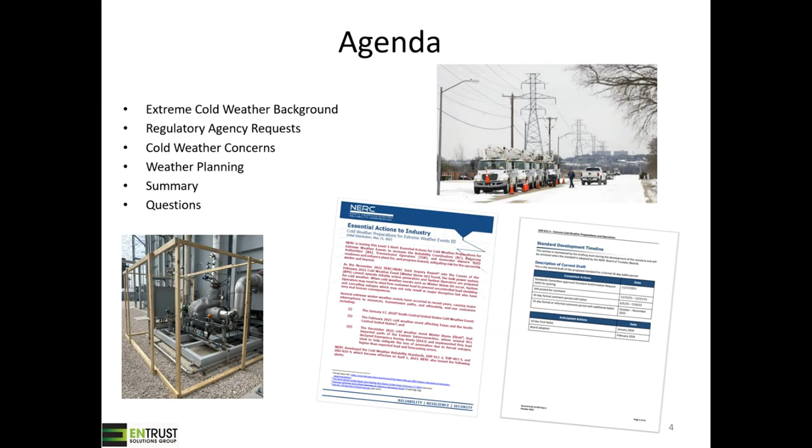Extreme cold weather background. So recent cold weather events: January, February of 2019 was what was called the Midwest Arctic Polar Vortex. Now, it's not impressive, but downtown LA never reached greater than 70 degrees for the whole month of February, which is a pretty significant event for LA. Chicago was minus 23 degrees with wind chill of minus 52.

More recently, February 2021 was Winter Storm Uri. During this event, there were 4.5 million homes and businesses without power in Texas, a record low at the Dallas-Fort Worth airport of -2. Keep in mind, this is Texas. And it was estimated that just over 700 people died in Texas due to the cold weather event.

December of 2022 was Winter Storm Elliott. This had single-digit temperatures in the southeast. December 23rd, which is right before Christmas, 1.5 million customers without power. Each of these events significantly strained the electric infrastructure, causing inoperable utility equipment and power outages. All of these events impact our day-to-day lives.

I am now going to pass it over to Rachel to discuss regulatory agency requests that came out of these events.

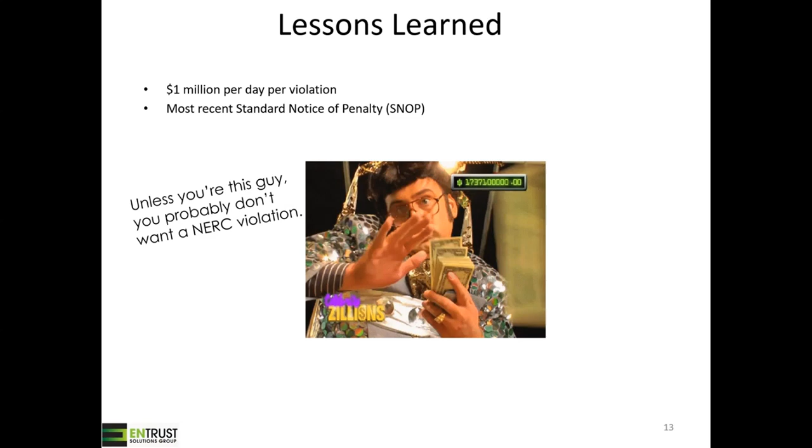Okay, so I always just like to remind people that unless you're this guy right here, he looks like he's got plenty of money to throw around. Unless you're him, you probably don't really want to get a NERC violation that results in a fine. And I just like to remind people that fines are capped at $1 million per day per violation. So it's not cheap. And I think anybody who's been in the industry a while knows that fines are rarely that expensive, but it's scary because you don't know that they won't be.

A lot of standards that had never really had any penalties and violations associated with them are now getting some pretty big fines. And so I would suggest that if you even have a question as to whether NERC or your regional entity will fine you, go and look at the most recent notice of penalty, and you can see that they are fining people, and it's not fun or cheap when it happens. So just don't forget, think about this guy. Unless you've got lots of money to throw around, don't get a NERC violation.

All right. Thank you, Rachel. So, having discussed the EOPs and the associated requests from the regulatory agencies, we're now going to transition to discussing some common cold weather concerns and how to address them in the facilities. So we'll just start with the fuel system. The fuel supply is typically outside the scope of our assessment.

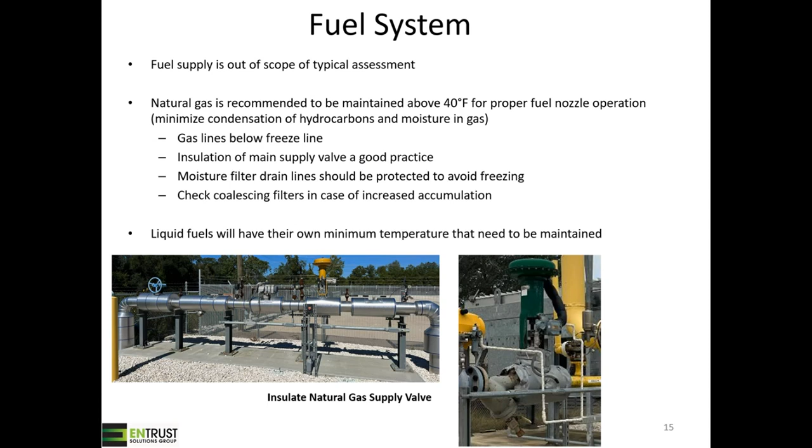Gas turbine inlet and bell mouth. So inlet icing and snow accumulation can cause excessive pressure drop, causing unit derate or trip. Well-sized hoods should be used to protect the inlet from snow. Coalescing type filters, if used, should be removed before winter. Note that compressor bell mouth icing can occur when inlet air is cold and humid, but actually above freezing. Isentropic acceleration of the air can reduce air temperature as much as 4 degrees, meaning that even though it's 36 degrees out, you could have conditions for icing within your bell mouth.

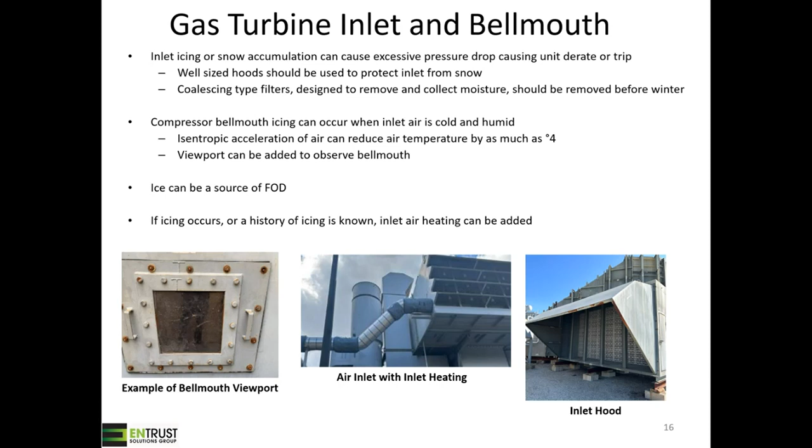Turbines and generator. Gas turbine performance improves with lower temperatures. There are bleed valves and purge valves depending on your configuration that can freeze. If valves are inside the enclosure, that can be a good form of protection. It is recommended to heat the turbine enclosure. A good practice is to place the turbine on turning gear at sub-freezing temperatures.

Note that the timing of any seasonal combustion tuning should reflect current weather patterns. This is dry low emission specific. This tuning does more than just account for changes in the ambient temperature and humidity. It can also account for seal degradation that makes combustion systems more sensitive to the cold weather operation. Just because there were no issues with the combustion systems and reaching emissions during cold weather operation last winter does not necessarily mean you won't have a problem this winter. Recent discussions with our customers ran into a couple instances of units having issues due to the cold weather tune not being sufficient.

Steam turbine performance is not impacted by the cold weather. This excludes issues with the steam delivery system. Generator output improves with lower temperatures. Generators typically have internal strip heaters to ensure moisture levels are kept low. Regardless, there should be a dedicated enclosure heater to regulate the enclosure's temperature. Some units do have minimum stator temperatures to protect the insulation. This ties back to a point Rachel made about ensuring doors are shut. This can also apply to enclosure louvers. They need to be checked for functionality.

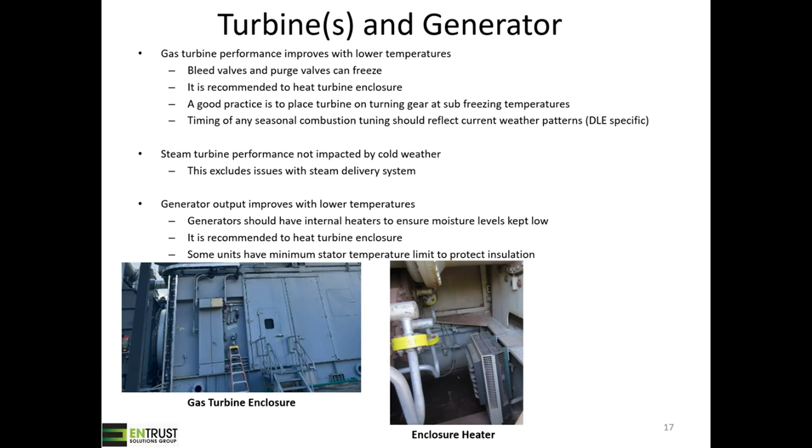Plant air, valves, and instrumentation. Plant air must be kept free from humidity. Compressor drains should be kept from freezing. Air dryer should be capable of dropping the dew point by a minimum of 18 degrees below the ambient. This is an ISA standard. That is a recommendation. It's not a requirement. The Instrument Society of America suggests having your dew point 18 degrees below the expected min-ambient.

So there's a couple different options for air dryers. We recommend the desiccant air dryers. Those have some typical capability of -40, -60, or a -100. There are different kinds of air dryers, the refrigerant style, and those typically have issue meeting ISA standards, even in the southeast where it's typically warmer in the winter.

All critical valves should be insulated. Pressure and flow transmitters for water systems should be protected in boxes with heat for temperature regulation. Sensing lines for water systems should be heat traced and insulated. A note on heat trace is you should ensure that it has been sized for the equipment being protected. We recently had a discussion with someone who actually had too much heat trace applied to a sensing line, which actually boiled the water, giving them erroneous measurements. And this was somewhat problematic during the cold weather because it was up on the top of their HRSG.

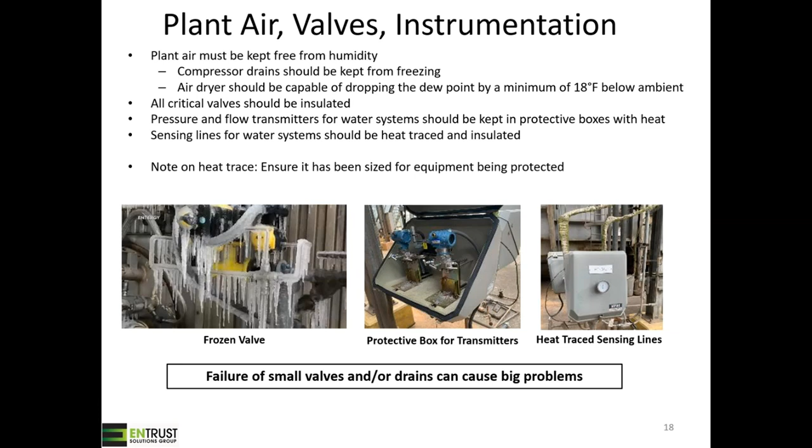Note here, the failure of small valves and drains can cause very large problems. So it's not necessarily that the gas turbine does not work. It can be a drum level sensor goes down. It can be that the plant air compressor drain freezes, so you lose your air. There can be very small components on the facility whose failure actually takes down the full plant. So the attention to detail in the winterization plans is important. Typically, you can leverage successful past operation or past unsuccessful operation to understand where your weakest link is in your equipment.

Now we'll discuss winterization methods. All necessary water systems need to be protected. Typical ways of doing that are insulating water lines with heat trace. You can also use recirculation from a warm water source. A good example of this may be a 50 to 60,000 gallon DMIN tank on site, and potentially you're able to cycle water from that DMIN source back through the line.

That large tank, a good example would be, let's say, the southeast, where cold weather events typically do not last for weeks at a time. It could be a couple days at a time. That large tank will stay warm during that event, so the circulating water can be a good way to keep the water from freezing. Cooling systems that use water wherever possible should have a glycol water mixture to drop that freeze temperature. If you have a DMIN house, a water treatment building, that should be enclosed with heaters.

All unnecessary water systems should be shut off and drained. So if you have inlet cooling, fan sprays, etc., typically these are not used during cold weather operations, so their failure wouldn't necessarily take down a unit. But depending on where you're operating, for example, Texas, just because you had cold weather one day doesn't mean you won't have warm enough weather within a week to necessitate using the inlet cooling. So draining and laying up these systems can ensure you have uninterrupted operation or avoid any derates due to failures of these systems.

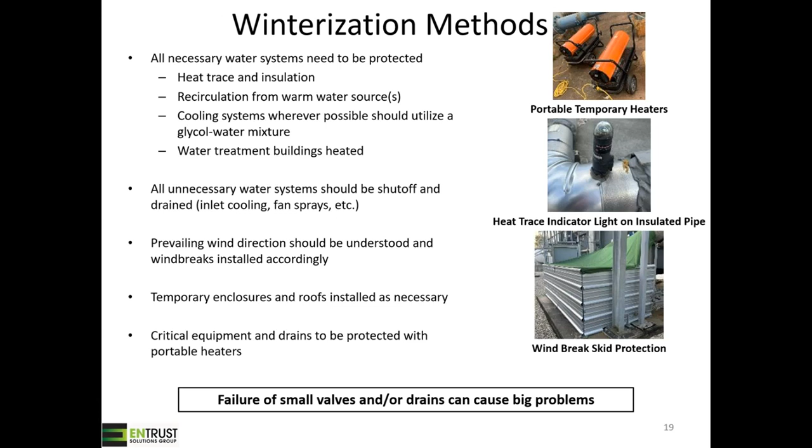The winterization methods and processes used for other water-based systems are applicable to the combined cycle plant. There's just a lot more need for that protection. And there are many cold weather critical sensors, valves, and equipment. Depending on your plant configuration, key equipment could be in the basement of a steam turbine building, which could provide significant protection for a good amount of your critical equipment. There will still be lots of sensors and valves around the plant, especially on the HRSG and on top of the HRSG, that need to be protected.

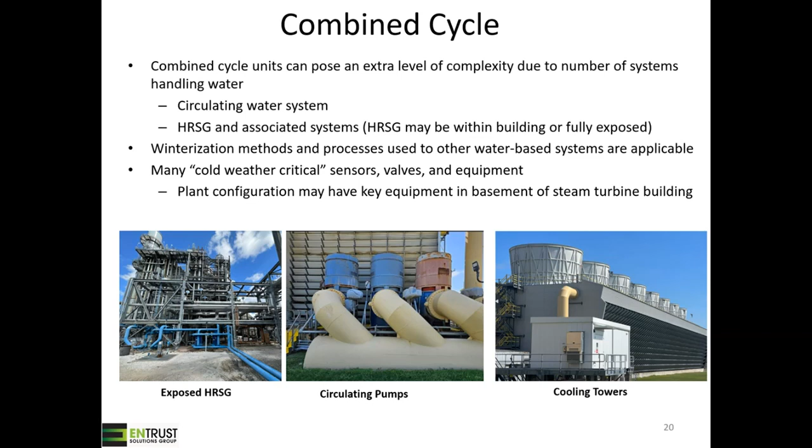The effect of wind, as Rachel mentioned in EOP 12-2, which has driven regulatory requests coming out of ERCOT, is about accounting for the effective wind. Freezing temperatures combined with high winds will reduce the time to freeze. If ambient temperatures are above freezing, the wind will just reduce the time to reach that ambient temperature. But the major concern is when your ambient is below freezing. High winds mean whatever is unprotected will freeze faster. So stagnant and unprotected water lines are highest risk. You should drain and purge any water lines not in use.

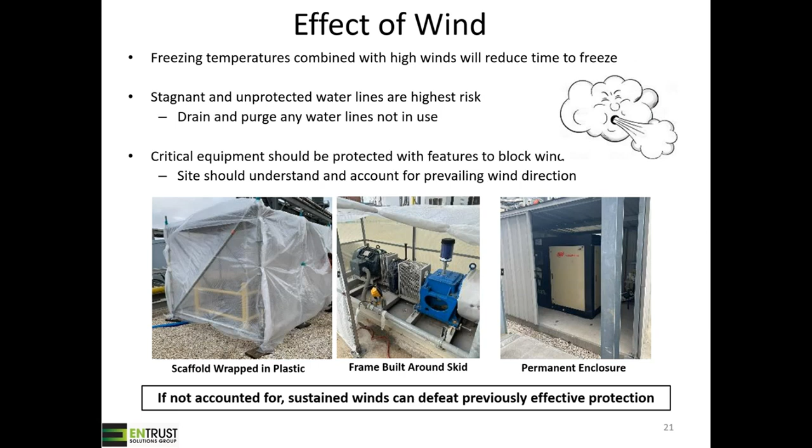If not accounted for, sustained winds can defeat previously effective protection. This is why EOP 12-2 does have a separate call out for addressing wind. It's not just about understanding the ambient, it's also about understanding the effects of wind and precipitation.

Now that we've discussed cold weather concerns, we'll discuss weather planning. So weather plan components. Sites should maintain a plan appropriate for plant location. And these are the items that we think are important for a good weather plan, and they're also very consistent with what you read in EOP 11-2 and 12-2. So a good weather plan should include the following: revision control.

So you can update your document and confirm and ensure everyone is using the same version of your document and ensure it is the latest version of the document. Weather plans should be treated as a living document, so you should be able to change it. That should not be a barrier to making improvements, but ensure that you have some sort of revision control. Make sure that everybody's on the same page for which is the latest process and method.

You should document your historical min and max temperatures. So location-specific record temperatures. This is the ECWT that Rachel talked about. You could also document your successful min and max operating temperatures as well. Equipment list should be part of this weather plan, so weather sensitive and critical plant equipment. You could also list out additional weatherization supplies and equipment, so go boxes, go bags. What type of stuff should you get together and where should you stage it?

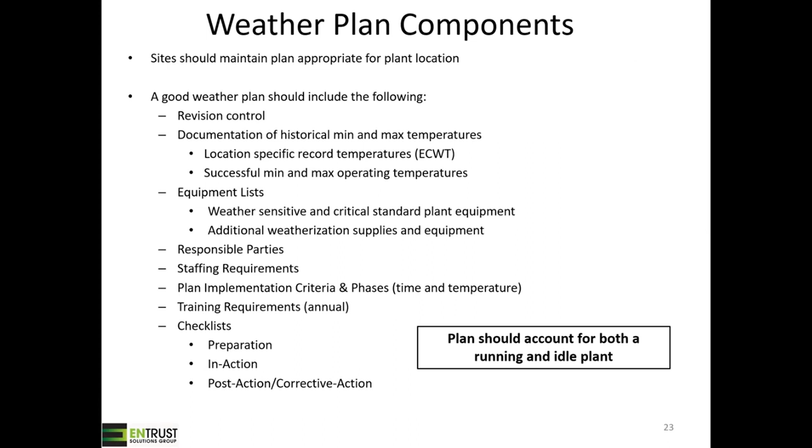This is the summary. So our weather readiness services. So we can help with cold weather compliance requests, NERC, ERCOT, CAL-ISO. Our engineering assessments of site weather readiness accomplish 3 goals. Now, although there are 3 goals, you don't have to necessarily do all of them. You can choose these separately, but typically these are the 3 items we will address for a customer.

So we'll address the plant's current min temperature capability and address the regulatory body request. We'll identify equipment limitations and opportunities for improved robustness. And we will review a plant's cold weather preparedness plan and provide feedback about freeze protection measures.

Typically, in our most recent visits, most sites have pretty legitimate plans. Everyone kind of understands the direction NERC is going. If you're in the ERCOT market, you have received specific requests for the site min ambient capability and most recently wind chill capability. So everyone has started developing these plans and has taken cold weather winterization more seriously.

Having said that, it always helps to have an independent engineering assessment to help provide additional information. Our assessments are a combination of operational data analysis, so data historian or PI data, review of plant maintenance records, an on-site plant walkdown, engineering calculations, and expert experience.

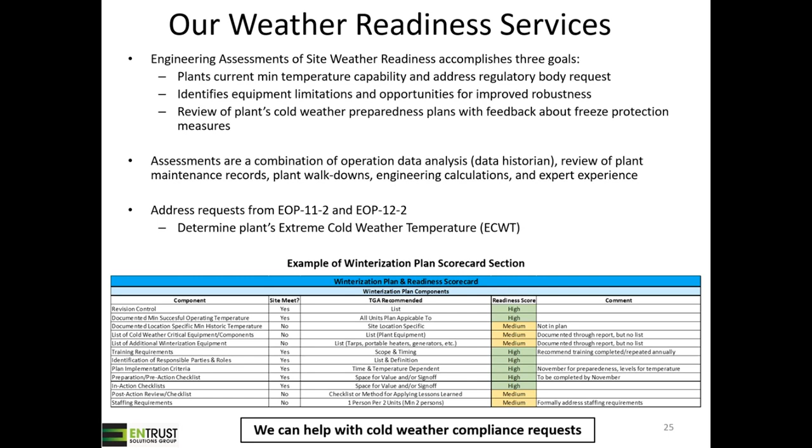So in summary, preparation and planning is critical for plants to remain operational during cold weather events. Regulatory requirements for cold weather capability are here to stay and are becoming more rigorous. Like Rachel said, this is not going to get easier. This is only going to get harder.

And everyone should be working now to be compliant with EOP 12-2. It is rigorous and detailed. Rachel went through that full list of items. There's a lot there. Keep in mind, October 1st, 2024 will be here sooner than you think. Rachel, do you have any additional comments?

Maybe just one little comment. One thing that I'm seeing with the NERC standards is that people are struggling developing a decent training program that they can carry forward and continue to use, and that is meaningful to their plant. So that is another thing that we could help with if needed, we could help get you some training in place so that your people can do something that's effective, that doesn't take a long time, but that will help you with compliance. It's the only thing I have.

And that's part of EOP 11-2 currently, or is that in 12-2? It's in both. It's in both. So if people are struggling with getting their training and making it valuable, that's something we may be able to help you with.